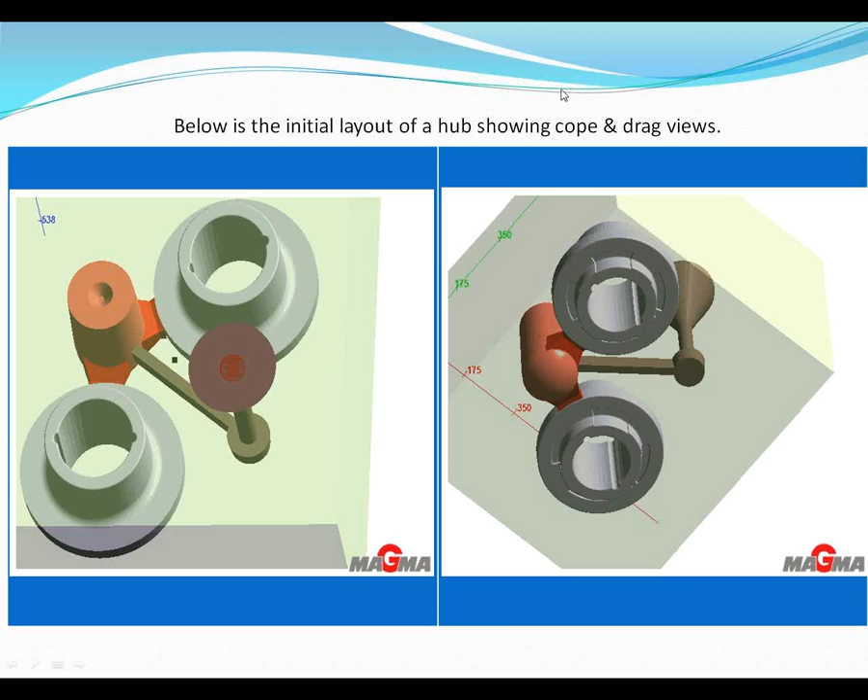This slideshow demonstrates the process Solid Solutions uses with Magmasoft Software to test and solve your gating and risering designs. This slide shows the initial layout of a hub casting showing cope and drag views.

After running the layout in Magmasoft, the results on the left in X-ray vision show areas of predicted porosity as light blue. The sectioned part on the right shows the location and degree of porosity.

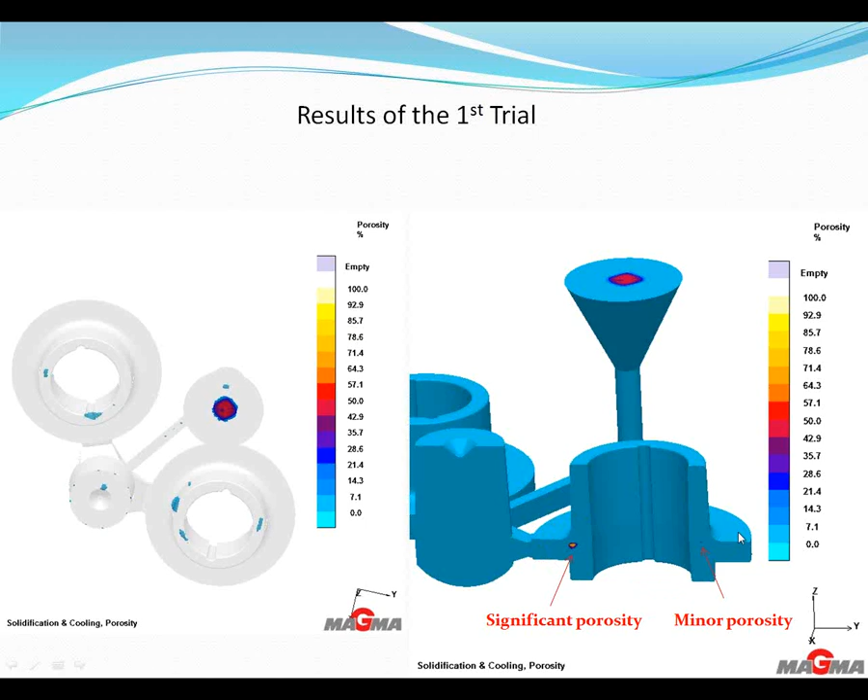This picture of the sectioned casting at 76% solidified shows remaining liquid as light blue. At this point, the riser is still mostly liquid, but the feed path to the T section of the casting is cut off. This results in the shrink seen in the T section.

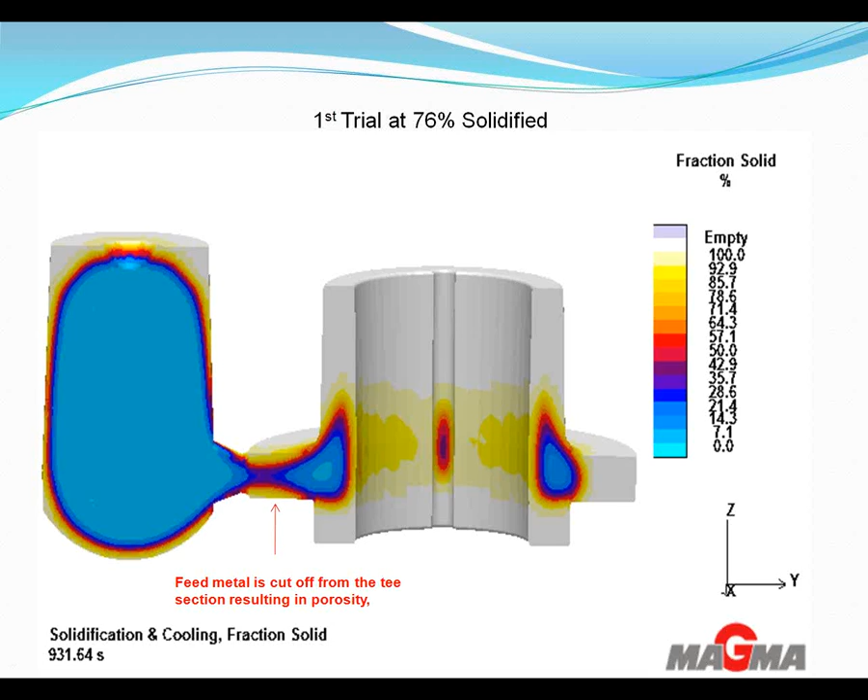Only a large pad between the casting and the T would allow the riser to work and eliminate this shrink. This pad would be costly to remove in finishing. The next step in the search for a least cost gating solution was to try the part turned over as shown on this slide. The results were the same as the first trial with shrink in the T section.

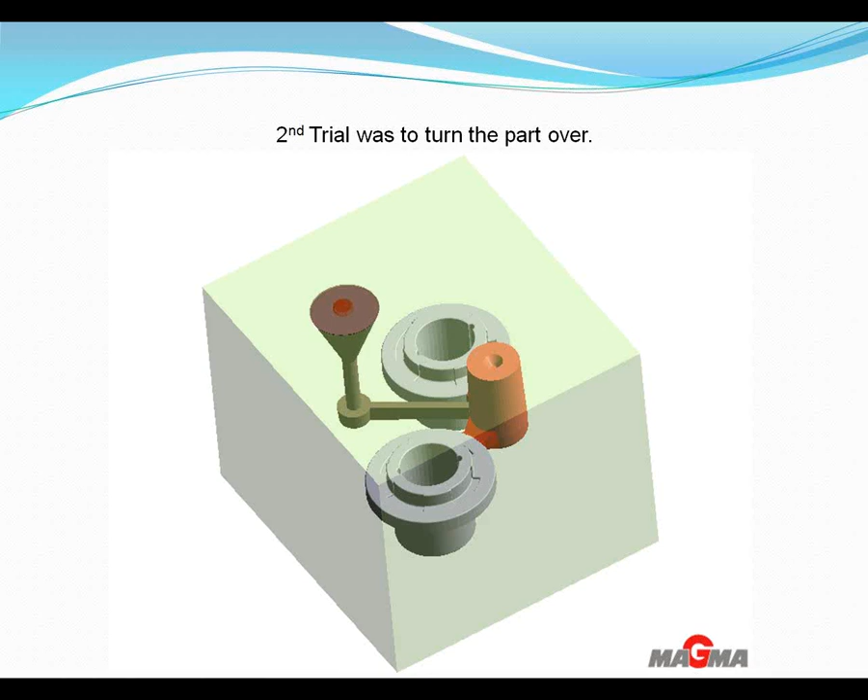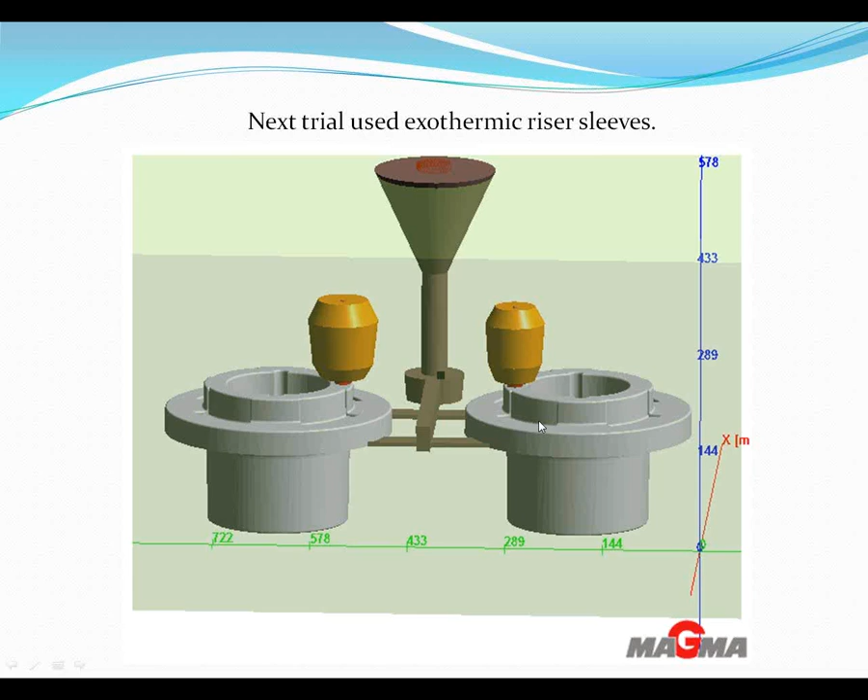An exothermic top riser sleeve was then tried in place of the side riser. Two different sizes were tried, the larger riser sleeve on the left and the smaller on the right. The results of this trial show the smaller riser on the right had gate shrink under the riser, as well as shrink on the opposite side of the casting away from the riser.

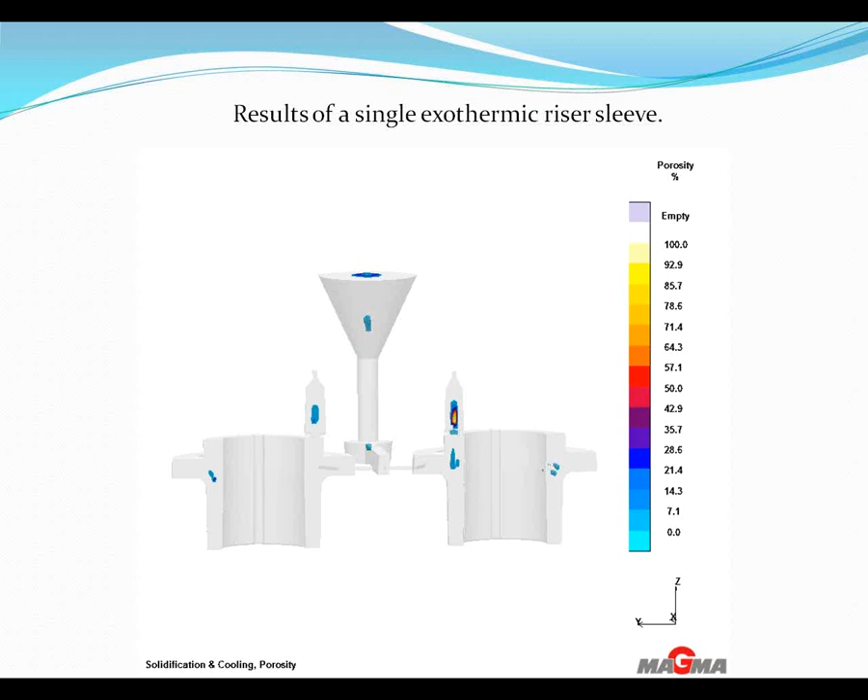The larger riser on the left had no gate shrink, but did show shrink on the opposite side of the casting away from the riser. To eliminate the shrink, it is necessary to add risers on both sides of the casting. Once again, two sized riser sleeves were tested.

Thanks to this process, this new job was sampled one time with sound results and a least cost gating system, saving time and money.